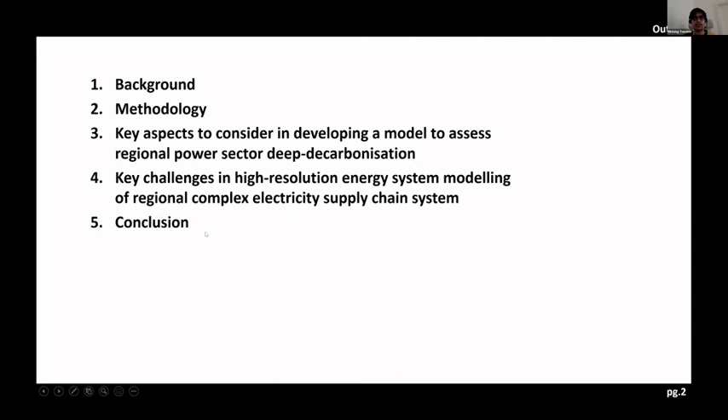To introduce the issue, deep decarbonization of the power sector plays a key role in reducing total greenhouse gas emissions dramatically to meet climate stabilization goals. The common strategy is to avoid, reduce, or remove carbon emissions from electricity generation, and use low carbon or carbon-free electricity to help decarbonize residual emissions from other hard-to-reduce sectors such as transportation, building, and industry.

Charting a path towards power sector deep decarbonization is a complex task, considering the wide-ranging portfolio of technological solutions and respective challenges. A good fit model is suitable for scenario analysis to help substantiate questions related to system capacity deployment and operation, as well as to provide insights on how the system behaves in a given condition.

So the research question here is: in assessing pathways of regional power sector deep decarbonization, what are the aspects of energy system modeling that need to be considered? What are the challenges in modeling the complex electricity supply chain, and how to address these aspects and overcome those challenges?

As we know, the key issues related to the energy system is that power sector deep decarbonization needs to integrate large-scale renewable energy resources and carbon capture, transport, and storage technology. There are risks of over- or underestimating potentials and impacts by not considering the spatial and temporal implications. This is mostly regarded to the access, quality, and cost of different energy sources, and also carbon - we call it source and sink matching.

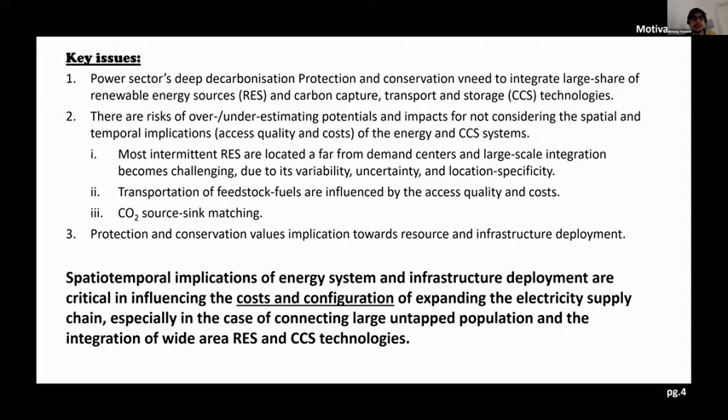The aim of this review is to give a comprehensive overview and to discuss the key aspects and challenges of spatially explicit energy system modeling for regional power sector deep decarbonization. There are different focuses of different literatures that I classified here to give an insight about the aspects and challenges.

First is those that focus on the grid-based multi-energy system concepts and modeling, where there are different energy processes and networks to be considered in a full energy system or energy supply chain. Then there's the biomass supply chain model, different supply chain analysis for the biomass feedstock in a process.

And there's the generation and transmission co-optimization model, where this considers also the transmission and distribution on top of the generation problem. There's the carbon capture and storage infrastructure model that considers different networks of CO2 capture and storage for the energy sector. And there's the integrated assessment of energy system externalities, and the evaluation of energy system modeling frameworks.

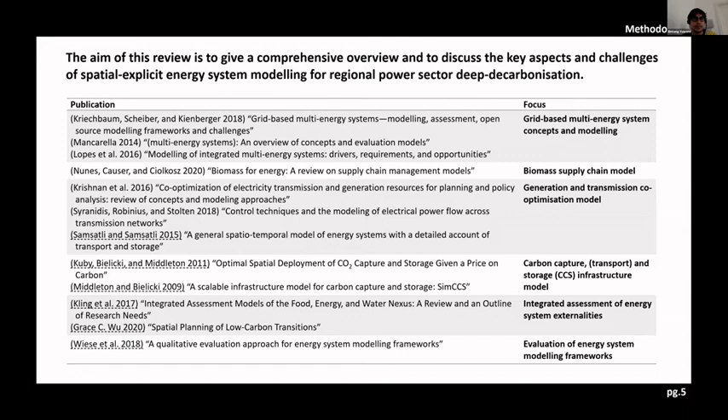We start with the finding when we see the aspect of modeling, especially in the scope and coverage, trying to address the real problem. The decarbonization of the power sector is achievable through deployment and operation of low, zero, negative carbon electricity supply technologies.

The power sector capacity planning aims to secure adequate, reliable, and cost-effective electricity supplies to the region. This has a correlation in how decisions on investment, such as size, siting, and when the technology can be deployed, or the operation of such technology to produce or supply electricity, becomes the question on how the decarbonization of the power sector can be achieved.

So the scope will be about long-term capacity investment planning, but considering the short-term dynamics related to operating activities. It covers, when we say regional, a region that consists of a country or multiple neighboring countries, such as the European region or the United States, for example, that have different states.

And this comprises different sub-regions that became interconnected with different transport corridors to transfer energies between locations.

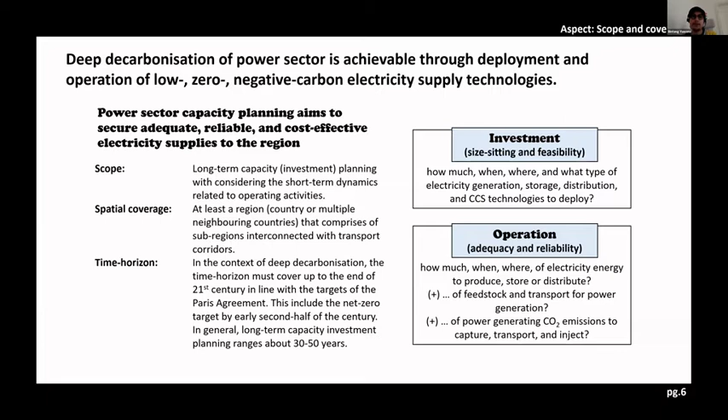Envisioning these kinds of pathways requires an understanding of how the energy system could evolve in the future through scenario modeling. The system boundaries we consider must be carefully defined in order to comprehensively assess the various deep decarbonization strategies.

We categorize those strategies in three ways: using low, zero, or negative carbon technologies, by means of different energy carriers that have different emissions impacts, such as using lower emissions natural gas and biomass to replace high-emitting oil and coal, and also using zero carbon technologies by means of zero carbon generation, which is using renewable energies.

There are also negative carbon technologies when we envision the use of CCS, coupling with biomass to create carbon dioxide removal, or using direct air carbon capture and storage. All of these will impact how the electricity supplied fulfills demand in the region.

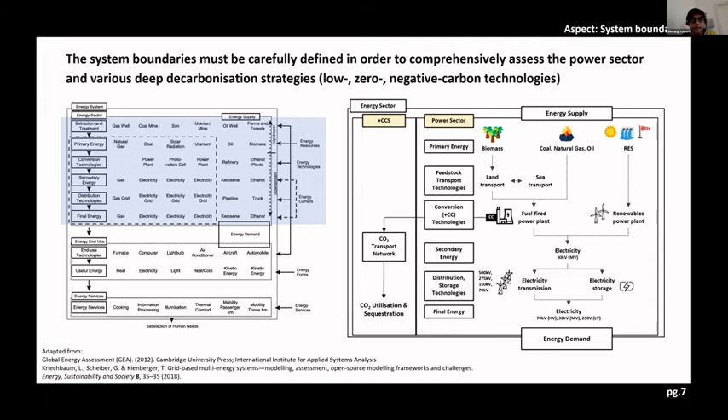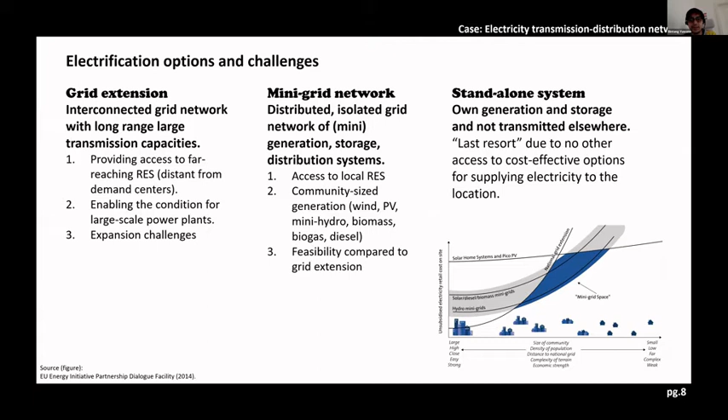The case here would be the electricity transmission and distribution network, where electrification has many different options and challenges, such as choosing to extend the existing grid, create a mini-grid network isolated from the main grid, or make a standalone system, usually in remote areas. There's also the challenge in deep decarbonization to integrate large-scale renewable energy sources.

The characteristics of renewable energy sources, starting from variability, can create profile costs, because there's a risk of inappropriate load matching, where there are risks such as undergeneration or overgeneration during the different loads of those renewable energy sources and the load of demands.

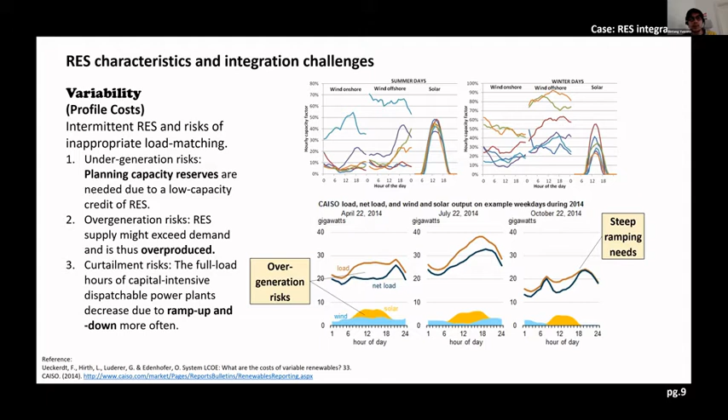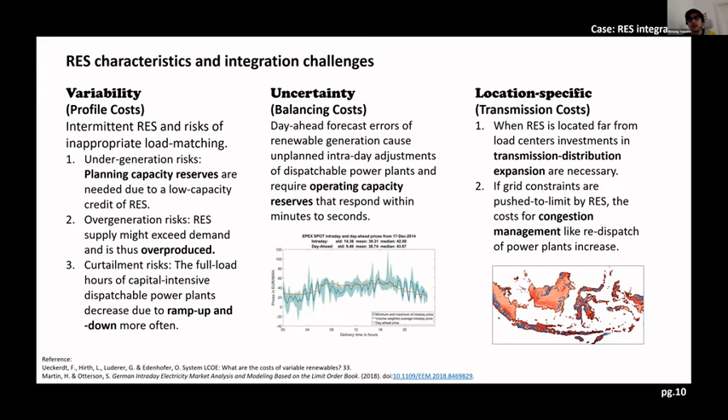There's also uncertainty, because day-ahead forecast errors can happen for intermittent renewable generation, and also the location specificity of renewable energy, which requires large transmission to transfer supply from high renewable energy regions to demand centers that lack these potentials.

There's also the case when we consider biomass coupling into the energy system. The cost of biomass and fossil fuel feedstock for electricity generation is largely influenced by how those resources are procured, treated, and transported.

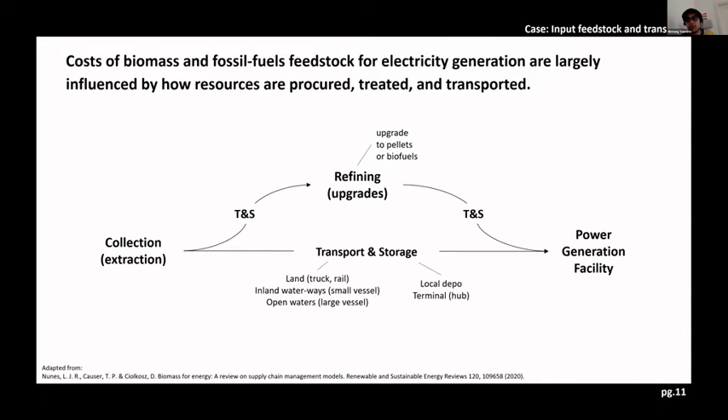For example, countries with large biomass potential that export it mostly need to consider how to use it domestically in a competitive way. They require an understanding of the improved supply chain for domestic measures, such as how they collect, refine, transport, and store feedstock for power generation facilities.

There are also different carbon capture, storage, and utilization technologies that can be coupled to the energy system to achieve the vision of negative carbon electricity in a deep decarbonization scenario. There are different capture points or technologies considered, as well as the network to transfer captured CO2 to points of utilization or storage.

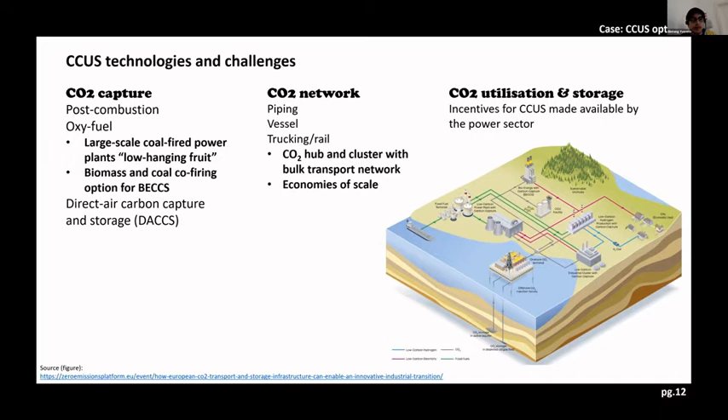The protection and conservation values imply implications for energy sector development in terms of resource usage limitations, siting suitability regarding infrastructure deployment, whether land is protected or restricted, and the operation of energy technologies regarding emissions or pollution controls and different renewable feed-in tariffs that make operations more feasible or competitive in the existing market.

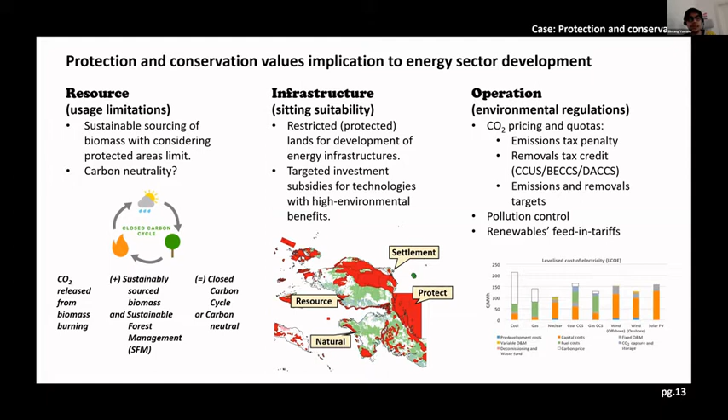With those challenges for deep decarbonization comes the cost of modeling effort in terms of increasing complexity, where it should represent the physical flows of energy along the electricity supply chain, and also the CO2 flows when we have CCS enabled.

So there are different levels of complexity that need to be considered when we have different components of the electricity supply chain in the context of deep decarbonization.

For example, when we have the electricity generation problem combined with the electricity transmission problem, combined with the CCS infrastructure problem, this becomes a really complex problem if we consider each aspect in the same way as a complex electricity system, for example with different part-load efficiency or the AC/DC conversion that makes it more complex.

But then there are choices to use assumptions to make the model simpler, such as a black box approach that uses constant efficiency instead of part-load efficiencies. So this consideration becomes about making it more complex or more simple for the model.

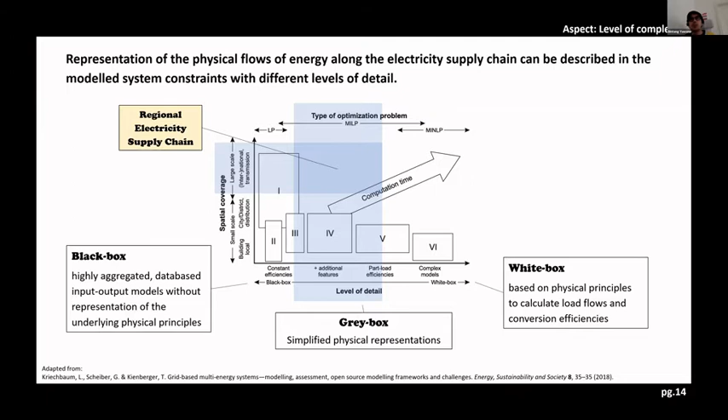And the aspect of the spatio-temporal resolution is important because in this electricity supply chain in the region, we know that the energy is not always supplied where and when it is required.

This imbalance may be compensated through transmission grid, to reduce the spatial problem between energy supply and demand, or held by storage to discharge at later time. This is to solve it temporally by holding it, charging it, and then discharging it in a different time.

So this issue about spatial consideration became important when we consider the different fuel costs, the different access quality and costs of different energy sources in different regions.

So, for example, when we define the complexity of the different components, it can be mapped in different levels of spatial and temporal resolution. For example, if we consider the electricity transmission and the generation and storage at the same time, it has to have the same level of detail to consider the movement of electricity and the supply and demand in a timely manner.

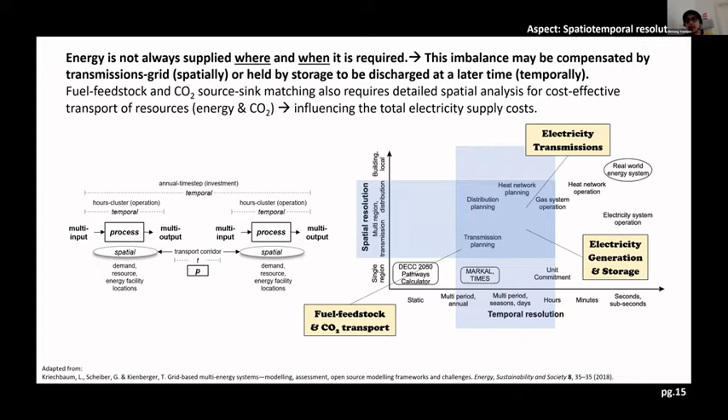So in terms of the model formulation, there are two types, two groups, depending on how they approach the problem. It can be a simulation or an optimization or a backcasting.

This is to provide a scenario of how the energy system should evolve given a future state, compared to the optimization part. And there's the partial equilibrium model, there's the agent-based model that consider the system as agents that individually assess its own situation and makes decisions based on a set of rules.

But also there's the question of how they address the uncertainty of the problem, whether using a deterministic model or a stochastic or probabilistic model.

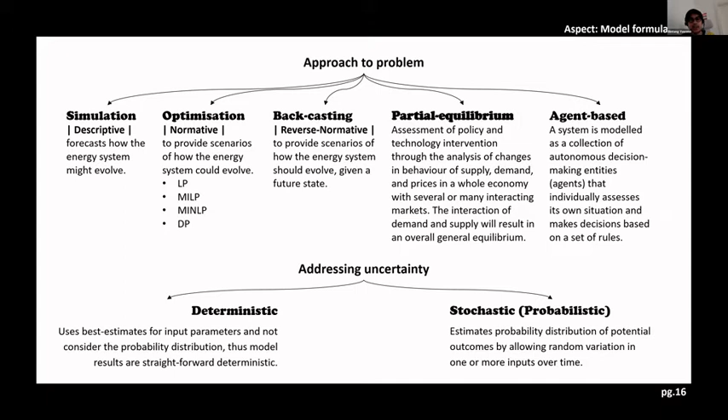This uses deterministic, using different assumptions and data that consider the best estimates, while stochastic modeling uses the probability distribution of data and assumptions to allow random variation in one or more inputs over time. This approach actually makes the model much more complex using the probabilistic distribution.

And there's also the aspect of data, where finer spatial and temporal resolutions of the model require appropriate values of both the parameters and independent variables.

This vast amount of data required is often not available because it is not measured or commercially confidential, or it's highly uncertain or in bad quality. Or it's also available in different spatial temporal resolutions. So the data can be coarser in those resolutions, or it can be finer.

But then there are also approaches on how to make the required data in the same level of resolution that the model requires, through downscaling or aggregation of data.

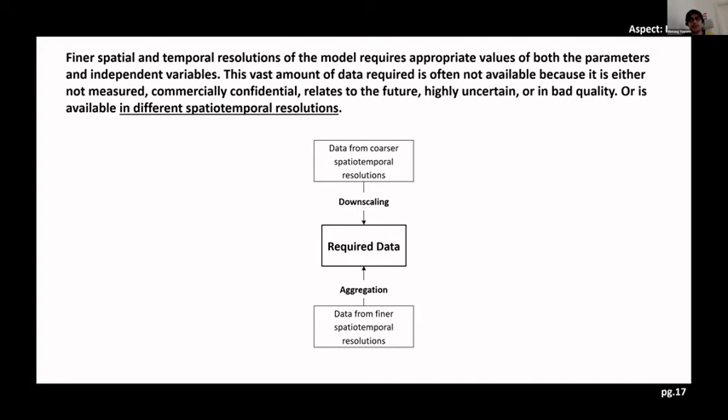Bintang, sorry to interrupt, 2 minutes left. It's okay, 2 or 3 minutes left.

Okay, I'll be short in this part. So there's also the aspect of assessment criteria. We consider different dimensions here: the technical dimension, the techno-economic dimension, the socio-technical, resource, and environment.

So the climate change mitigation and the sustainable development goals provide the integrating framework for assessing the feasibility of energy technology options, considering the integrated multi-dimension interaction between those technology, resources, society, and environment. So these will be considered for choosing different energy technology options, to consider whether it is affordable, secure, accessible, acceptable, and sustainable.

So there are challenges here, especially in addressing space and time. Selection of spatial temporal resolutions should consider the extremes where decisions may shift. For example, if we decide on expanding a transmission line, usually the cost information is per kilometer cost or per 10 kilometer cost. Then to what extent those information can be inputted to the model, and how we should consider how resolution is defined.

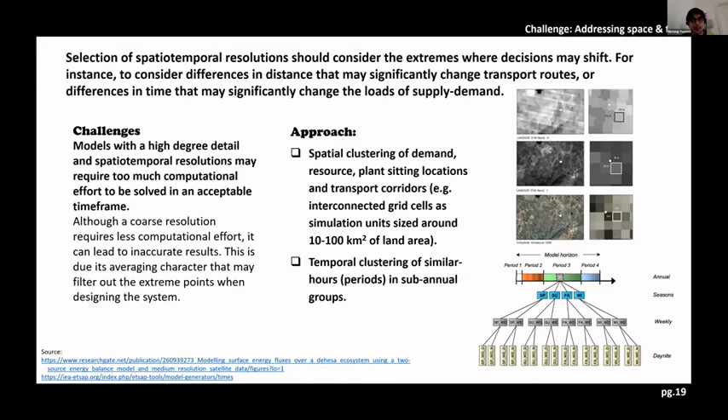And also regarding this, the appropriate assumptions and methodology are critical in delivering comprehensive results, while minimizing the required computational resources. So the issue about scale and complexity, we approach through problem simplification or decomposition of the problem, to make the model more tractable, or easier to deal with.

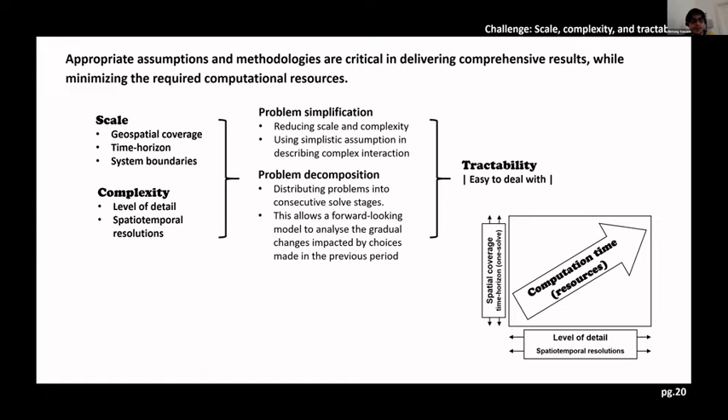And the third challenge here is the multi-dimension feasibility assessment. So coupling or linking technology-rich bottom-up models with economy-wide top-down models can integrate this large set of externalities to be considered, without significantly increasing the computation resource requirements.

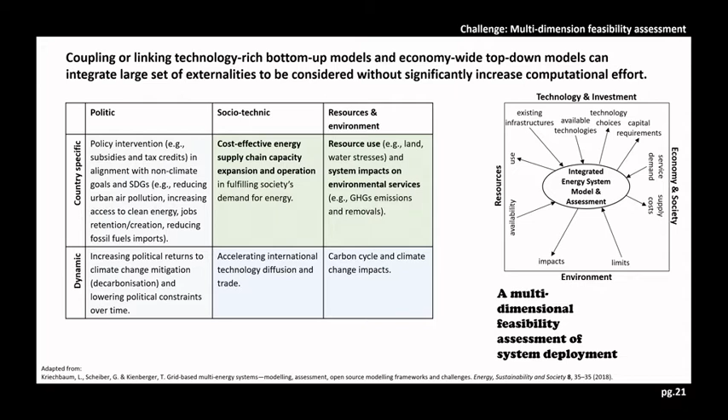So such as coupling this energy system model bottom-up technology options with CGE or partial equilibrium kind of model, to assess these different aspects external to the energy system.

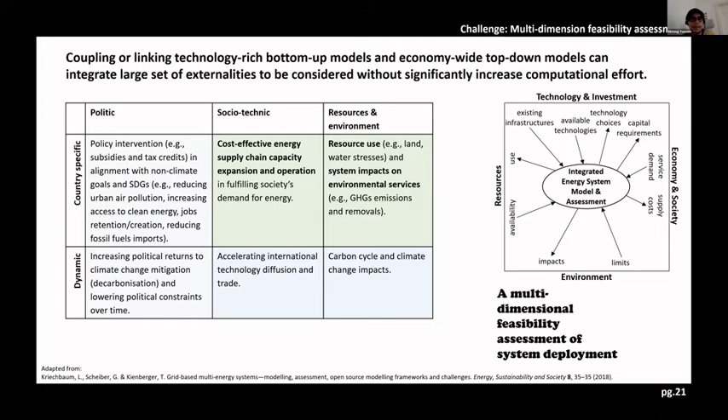There's also the challenge in uncertainty, transparency, and reproducibility. One minute left. Okay, so thank you.

Regarding the availability of data, as we discussed before, the required data can be downscaled or aggregated from different spatial temporal resolution if it's not available. But those data can also be information that are determined with best estimates or expert judgments, or with probability distribution around the data, such as wind resource distribution.

These need to be addressed, the uncertainties there, whether using determined data or probable data, using different approaches there. That is to improve, but in the process to address these uncertainties, there also needs to be improvement in the aspect of transparency to ensure that the process can be evaluated on how they address the uncertainties.

So improving the transparency and reproducibility, the concept of open source modeling, provide open data for the data processing part, but also provide open access for the model formulation and choice of software. There's also open data in terms of the results and how the results are processed.

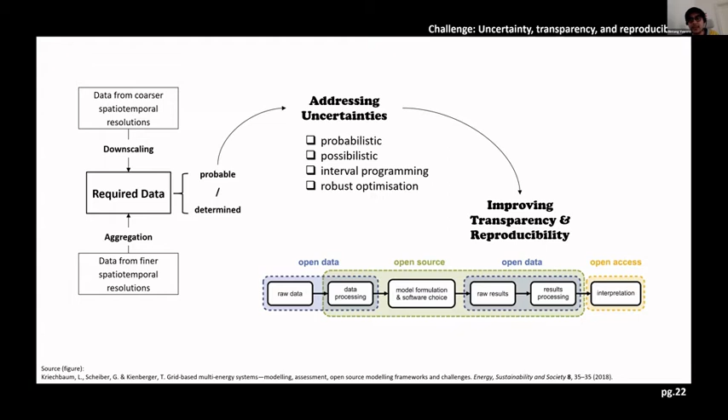So in conclusion, this paper provides an overview of the current research and challenges of modeling the energy system for power sector deep decarbonization. The key modeling aspects and challenges that need to be considered in model development have been discussed.

So there are aspects about robust and efficient analysis of the power system in the context of deep decarbonization. There's also the aspect to incorporate the complex interaction between various energy carriers, processes, networks, focusing on electricity generation, storage, distribution system, and power flows.

There's also the long-term capacity planning model that should account for securing the supply system in the short run. There's also the model formulation and data that need to be adjusted to best substantiate the problem in question. So the challenges can be addressed with coupling short-term operation models with long-term capacity planning.

There's increasing model complexity, also accounting for externalities that will hamper model tractability, and also soft linking bottom-up and top-down model solution options. There's also the aspect of open data, open source, and open access that need to be addressed to increase transparency and furthermore increase modeling impact.

Okay, and that's all from me. I'm open for questions.

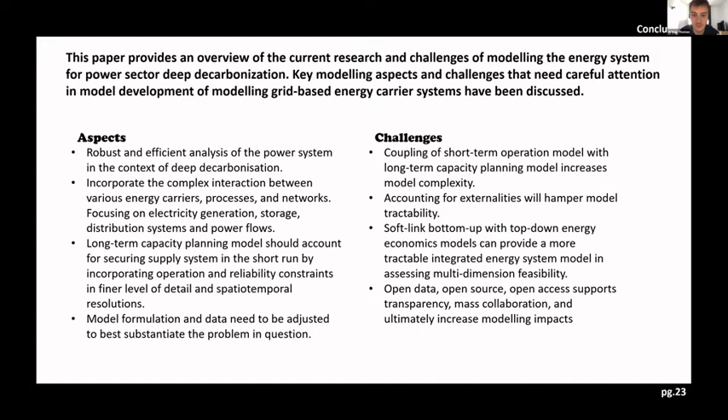Yes, thank you very much. Thank you very much for giving me the microphone. Can you hear me? Yeah, perfect.

Yes, my question was about CO2 emission first. Thank you very much for your very interesting presentation, I think it is quite comprehensive and it rings many bells with my personal experience. When accounting for CO2 emission, do you consider direct emissions mainly due to fuel combustion, or do you take into account indirect life cycle emissions, like for instance due to mining, manufacturing, installation, maintenance, or dismantling?

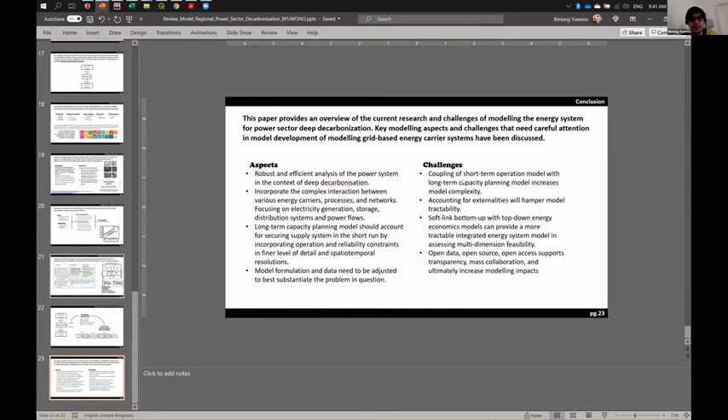Well, the plan is to have an integrated assessment where we consider also the land use impact of the energy system. When we already consider the spatial dimension, we can also consider the impacts of this energy system, considered in the localities where the different energy supply system is being deployed.

That also comes up with information on indirect land use emissions, and also in an energy network model, transportation of biomass can also be accounted for in terms of emissions for the transporting part. So this information can be evaluated when the model considers these resolutions, spatial temporal resolutions, and the energy networks.

Okay, I hope that answered the question. Yes, thank you very much.

Just an additional question. The way you integrate those environmental externalities, basically, if I understand you well, is as constraints. Are you in favor of monetizing externalities, or do you prefer to stick with more obvious factors like what we get from life cycle analysis, which tries not to mix distinct externalities and to keep separate, for instance, water pollution, human health, and biodiversity, to allow for a better understanding and balance between those several impacts?

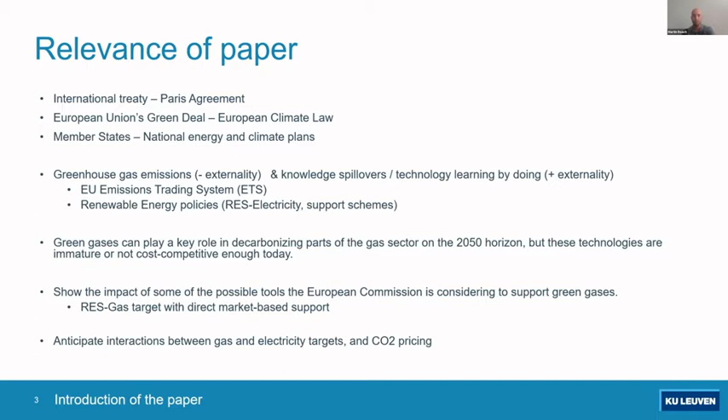In terms of what green gases are, they do not directly emit any CO2 of fossil origin. Hydrogen is an important molecule in industry and heavily relies on fossil-based energy. Two methods of green hydrogen production are water electrolysis using renewable electricity, or thermochemical conversion of biomethane, for instance.

Two methods of biomethane production are anaerobic digestion of organic matter, or thermal gasification of biomass. Biomethane can be readily injected into the gas network and subsequently used in any demand segment.

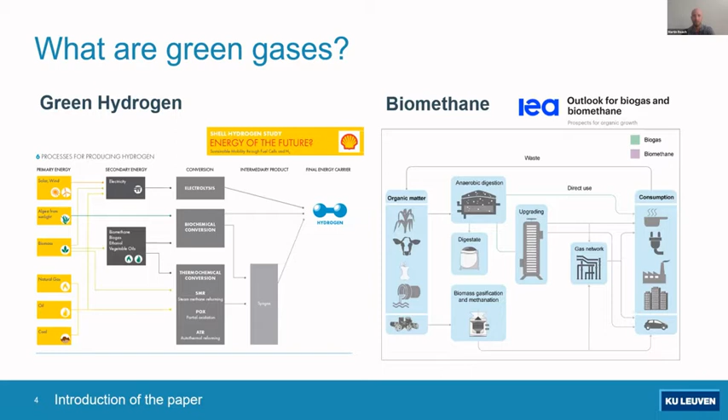I'll continue with the academic positioning. As I said, market failures related to CO2 emissions and knowledge spillovers provide an economic rationale for implementing a policy mix. As summarized by Lehmann and Gawel back then, one of the main concerns about electricity support schemes is interaction effects between instruments.

Some criticisms include that CO2 emissions reductions in the electricity sector would simply be displaced to industry, and that renewable electricity support schemes substitute a more expensive form of abatement for another.

The authors describe other market failures which also justify renewable energy support, which I do not detail here. Del Rio admits that policy mixes inherently lead to interactions between instruments, but suggests this can be mitigated in coordination or design. The interaction effects between instruments, namely renewable energy and carbon markets, has been studied using numerical models, which is the approach that we take.

This brings us to the gap in the literature, formulated as two main research questions. First, is a gas target and support schemes necessary to replicate the renewables deployment success of the electricity sector in the gas sector? We study to what extent existing policies support green gases. Second, are interaction effects between an electricity and gas target relevant in a multi-sector energy market setting? And if so, can we provide input for the design or implementation of a gas target?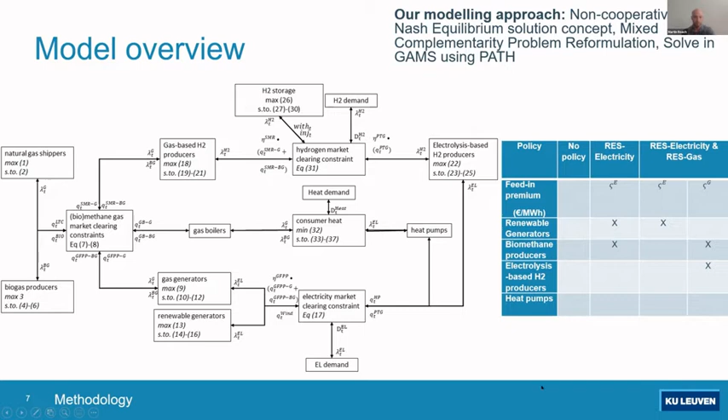We also consider the case of a CO2 emissions market policy in which natural gas consumption, including for heat, is subject to a CO2 price.

Here I will present our stylized approach with our main assumptions. We assume perfect competition and that agents have complete information. It's a single shot model where investment and production decisions are taken simultaneously. It's an integrated market model, so we do not model network constraints.

There are 4 representative days considered to capture seasonal or daily characteristics. We take renewable availability and demand data from a TSO, and heat demand from a time series dataset. We assume one representative technology for each agent and obtain the technology cost data from the DEA. We compute an equivalent annualized cost for each of them. We also assume that gas shippers and biogas producers have fixed variable costs. Lastly, for this type of model, we do not allocate the policy costs to the agents.

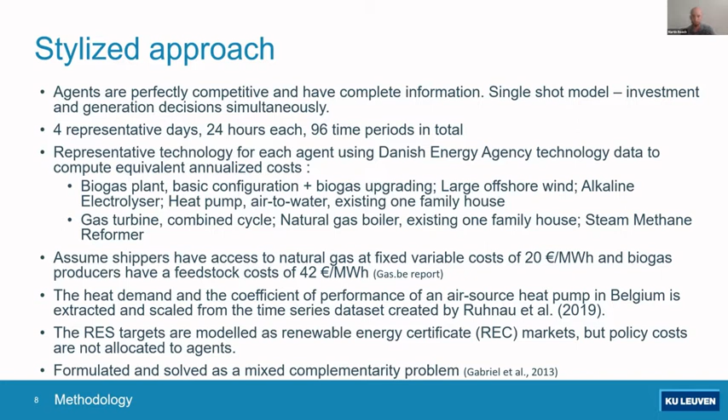We consider 3 policies, as I mentioned, which drive the investment decisions of agents. The first two are closest to the status quo, while the third is a possible way forward. The first policy is an electricity target. Given this policy, we run scenarios which change the ambition and investigate the solutions of each scenario. The second policy is a CO2 emissions market.

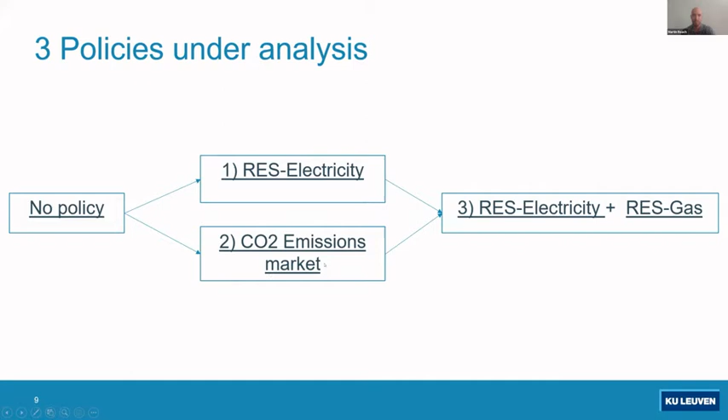I will discuss the findings of these two policies first, supported by figures. Later I will discuss the findings associated with the third policy, a dual electricity and gas target. Here's an overview of the findings in the same order.

In the electricity target scenarios, wind is the least cost renewable technology to meet the electricity target, and above a 40% target, more wind capacity causes spillage or curtailment. We illustrate with a 65% electricity target that biomethane and power-to-hydrogen are indirectly supported due to negative electricity prices.

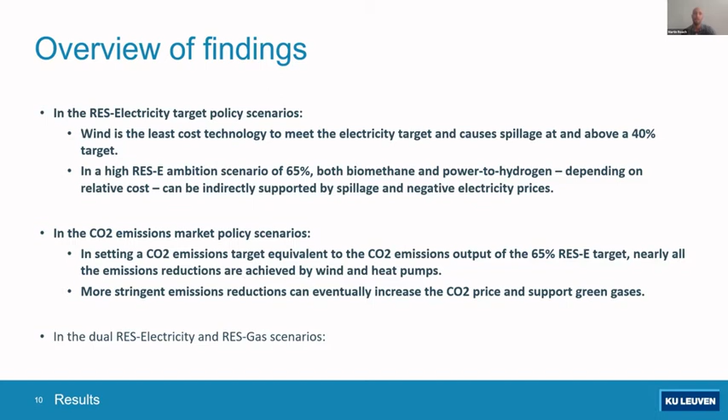In the carbon emissions market policy scenarios, a similar result is obtained when we take the CO2 target equivalent of the output from the 65% electricity target. Wind and heat pumps are the least cost means to make emissions reductions. But a more stringent emissions target increases wind capacity, which also causes spillage and electricity prices to go to zero in these periods. So the CO2 price would have to rise significantly, and eventually that would be enough to support green gases.

So this figure depicts the result of one of the scenarios - a 65% electricity target, as I mentioned. Over the 96 time periods, it illustrates the hourly generation in the shaded areas and demand via the stacked lines. You can see substantial generation from wind, and its unavailability is complemented by natural gas generators.

And as you can see in the last periods, there's substantial spillage from wind, and these cause negative prices, which reflects the point at which the wind generator is willing to reduce its output because of the opportunity costs associated with foregone subsidies. So in turn, the wind generator earns no revenue in these periods, but the negative electricity prices incentivize power to hydrogen, who is paid to consume.

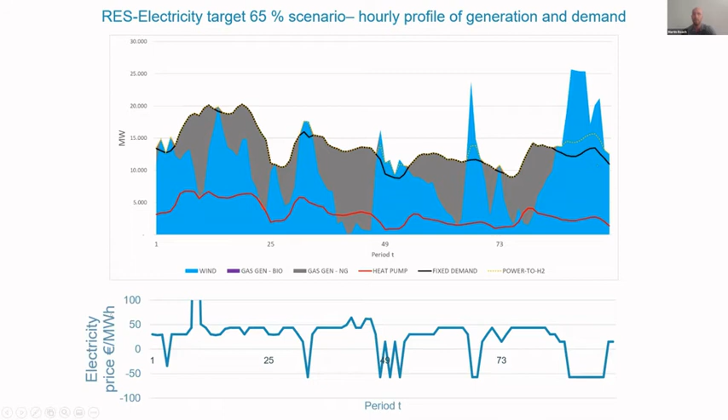So next we'll look at the emissions target policy. This figure depicts how energy supply and demand are met over an entire year in gigawatt hours and in each segment. This scenario reflects a CO2 emissions target equivalent to the emissions that were resulting from the 65% electricity target we just saw. So in the electricity segment, we see that wind plays a major role, and in the heat segment, heat pumps meet nearly all of demand.

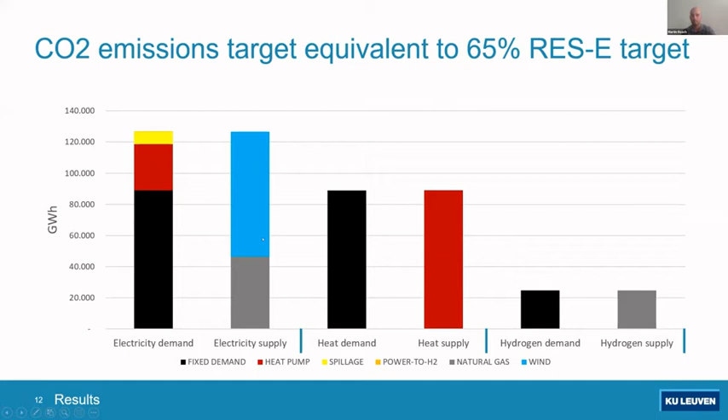So while wind is the logical outcome, the cost competitiveness of heat pumps improves against gas boilers as the CO2 price rises, and is a cost-effective way of displacing emissions. But as you can see, an emissions policy largely supports mature or electricity-based technologies. In the interest of time, I do not illustrate more stringent emissions targets, but if the CO2 price rises substantially as more spillage occurs, this can incentivize green gases. So as we can see, green gases are only indirectly supported by existing policies.

So let's consider a dual electricity and gas target and investigate potential interaction effects. The main findings here are that clear interactions exist. An electricity target can contribute to a gas target and vice versa. However, these interactions are substitutive, meaning progress in one may crowd out investment in the other. In other words, the final output of renewable energy in the electricity or gas sector depends on the coordination of the electricity and gas target ambitions.

Additionally, the deployment of power to hydrogen appears to depend more on the electricity target than the gas target. Therefore, it's a bit unclear if a gas target is effective in supporting biomethane and power to hydrogen if defined in technology neutral terms. So first, I'll just demonstrate what I mean by interaction effects via three scenarios, illustrating renewable energy production over an entire year in gigawatt hours.

So for each scenario, you can see renewable energy's contribution to the electricity target on the left and to the gas target on the right. One may expect the combined effect of renewable energy policies to be at least the sum of the parts, but that's not what we observe. In scenario one, biomethane is the least cost resource to meet a gas target. In scenario two, wind is the least cost resource to meet a 25% electricity target. So you would expect scenario three to be the sum of these two individual targets, which is the total RES aim, but instead there's less.

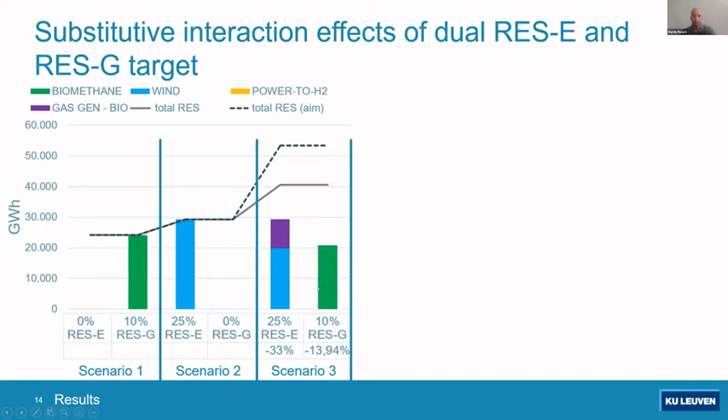So scenario three combines both targets, and two substitutive interaction effects result. For the gas substitutive effect, when biomethane is produced, part of the gas generation can then be counted as renewable. As a result, this counts towards the electricity target and crowds out wind investments. For the electricity substitutive effect, as you build out more wind, this displaces some gas generation. As a result, this reduces the total gas consumed, and thereby the total quantity of biomethane necessary to meet the gas target.

So I'll not go into detail, but through the electricity and the gas target, this plays out and is somewhat cyclical. To evaluate the strength of these interaction effects, we look at the coordination of the targets, taking some more scenarios. So in scenarios 4 through 6, we doubled the ambition individually and together.

So in comparing scenario 3 that we just saw to scenario 4, which doubles the electricity target ambition, wind increases by 165% and biomethane decreases by 27%, even though the gas target was unchanged. And in comparing scenario 3 to scenario 5, which doubles the gas target ambition, biomethane increases by 120% and wind decreases by 63%, even though the electricity target was unchanged.

And then in comparing scenario 3 to scenario 6, which doubles both targets at the same time, wind more than doubles and biomethane only increases by 57%.

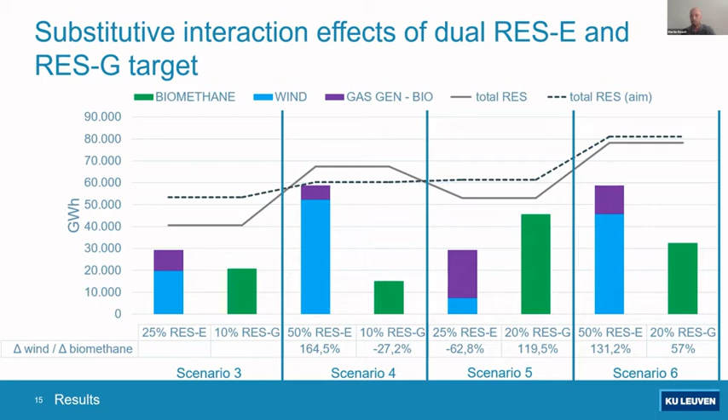Aside from these interaction effects, there are also clear interdependencies of the dual targets to highlight. So in the 25% electricity target and 10% gas target, but excluding heat pumps from the model in scenario 7, more biomethane is required as natural gas boilers are not substituted by heat pumps. Therefore, heat pumps help meet a gas target.

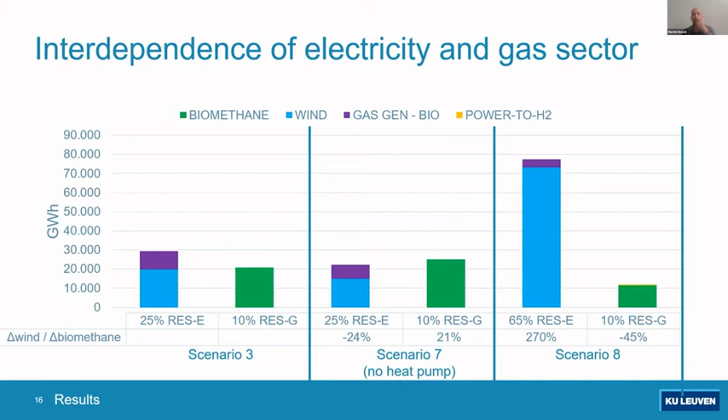Lastly, in the scenarios we've seen so far, biomethane is the least cost means of achieving a gas target, whereas power to hydrogen requires periods of spillage or curtailment to be cost competitive. And this is confirmed by scenario 8. So this kind of begs the question, if a gas target is deployed, is the gas target to deploy the least cost green gas, or is it to support a range of green gas technologies?

So I now move to the conclusions, which are based on the two questions we tried to answer. First, can we replicate the success in deploying renewables in the electricity sector, also in the gas sector? So in theory, if immature and emerging green gas technologies are not directly supported by current policies and face technology related market failures, then the motivation for a gas target and support schemes could be justified.

However, it's not clear which green gas will become most efficient in the long run. There's uncertainty about technology learning curves. So a policy could encourage a range of green gases which may not be achieved with a technology neutral gas target. The second question: are there potential interaction effects between dual electricity and gas targets, and what does this imply for the design or implementation of a gas target?

We see that there are clear synergies observed between the electricity target, which can contribute to meeting a gas target, and vice versa. However, this also means that there are substitutive interaction effects, which ultimately modify the final output of renewable energy in each sector. Therefore, to reach the desired goal of green gas deployment, these targets should be coordinated.

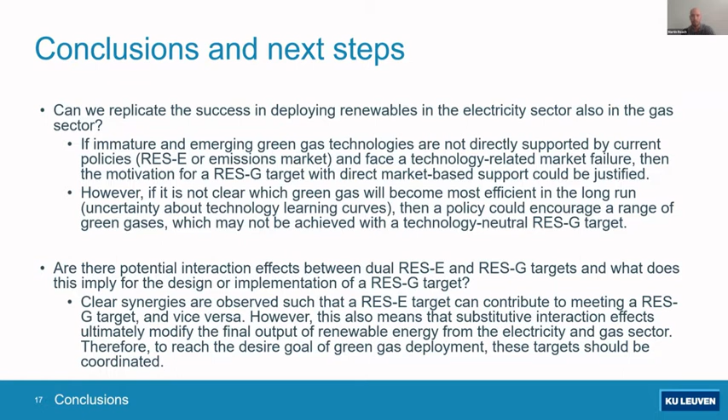That is the end of my presentation. Thank you for your time and attention. Happy to take any questions.

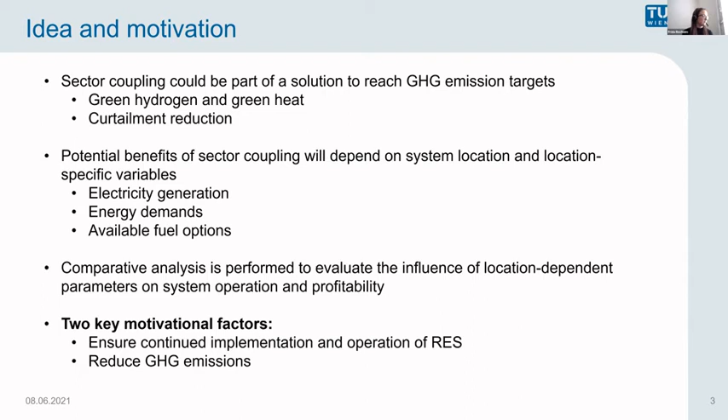In the paper we have some KPIs that we want to investigate to evaluate the performance of the sector-coupled system. We want to look at the profitability - how profitable the system is under the given assumptions. We also want to look at how the different technologies are utilized within the system.

Another important KPI is how well the system is able to reduce greenhouse gas emissions. We also investigate how well the system is able to be self-reliant in terms of meeting local energy demands with renewable energy produced within the system boundaries.

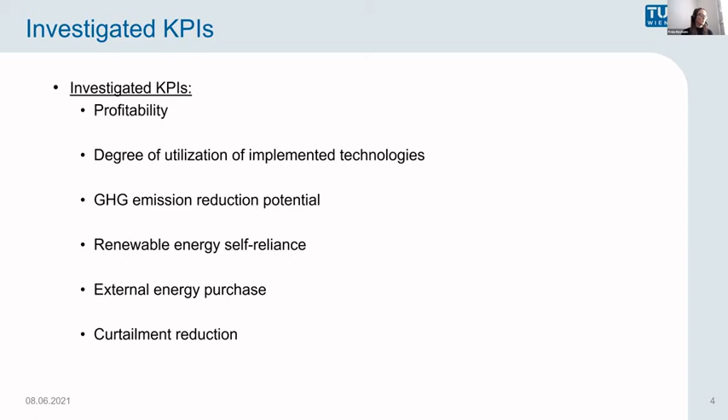We are also looking into how much energy is being purchased externally, from the market. And finally, we also want to look at the curtailment that's happening.

To investigate all of this, we have developed an optimization model of a sector-coupled system in Julia. So far it's a purely operational model - it doesn't consider any investment costs. The objective of the model is to maximize the profit while meeting the local energy demands and, of course, also following the technical constraints at all times.

The objective function is shown here, and we have revenues related to selling electricity to the electricity market, selling hydrogen to the gas market, and selling hydrogen to industry or mobility. The costs are related to buying electricity from the electricity market, either to cover the local electricity demand or for feeding into the heat pump.

There are also some costs related to buying heat from an alternative heat source to cover the local heat demand, and buying natural gas from the gas market to cover the local gas demand.

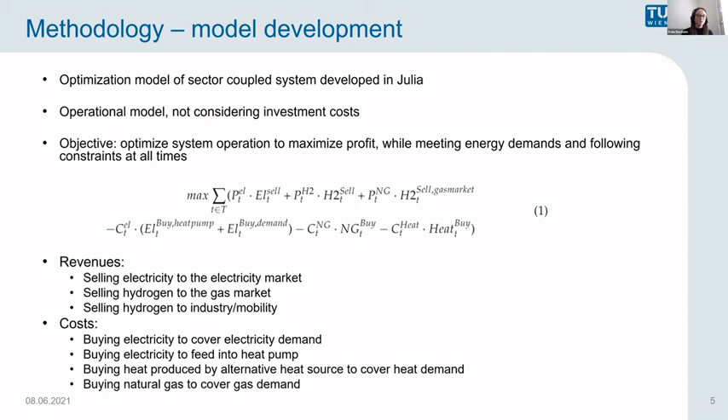Here is a figure which represents the system that we are investigating. It includes both power to heat and power to gas technology through the implementation of the heat pump and the electrolyzer.

The wind farm generates electricity that can either be used to cover the local electricity demand, sold to the electricity market, curtailed, or fed into the heat pump or into the electrolyzer.

The electrolyzer then produces hydrogen that can be used to cover the local gas demand, or it can be sold to the gas market or to the industry sector.

There is also some waste heat produced in this electrolysis process, and that waste heat is then used to cover the local heat demand. The remaining heat demand is then covered by heat from the heat pump and heat from an alternative heat source.

So we then defined 3 separate use cases: one Austrian, one Norwegian, and one Spanish use case. Each of these had individual location-dependent parameters. The parameters we chose to investigate as input were the electricity generation from the wind farm, the local electricity, heat, and gas demand, the electricity prices, the gas prices, and the price for alternatively produced heat. We also considered the type of alternative heat source available and the corresponding emission, and the electricity mix of the use case.

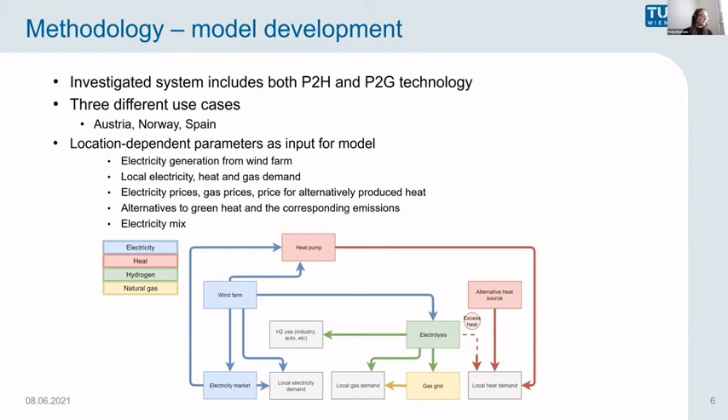So as I said, we defined 3 separate use cases: Austria, Norway, and Spain. The Austrian use case is assumed for the Neusiedl am See region, with 4,290 households. We assumed a wind farm with an installed capacity of 32 megawatts. Based on data from Eurostat, we found that the majority of the heat demand is covered by natural gas, but district heating and electricity are also important sources to cover the local heat demand.

For the Norwegian use case, it's based on the municipality of Åfjord with 1,961 households considered. The wind farm here is assumed to have an installed capacity of 57.5 megawatts. The majority of the Norwegian heat demand is covered by electricity, so for the Norwegian use case, we didn't consider any local gas demand.

The Spanish use case is made up of several smaller municipalities, summing up to approximately 1,000 households. The wind farm considered here was assumed to have a capacity of 31.5 megawatts. For the Spanish use case, we didn't consider any district heating demand, and the majority of the local heat demand is met with gas, but electricity is also an important source.

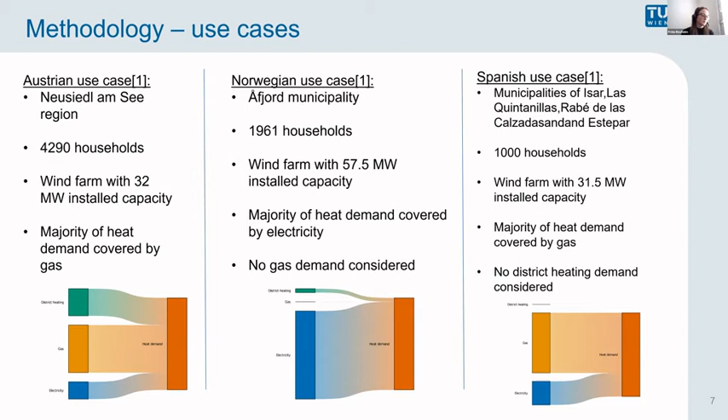So for each use case, we investigated 3 different scenarios. Scenario 1, the baseline scenario, didn't consider any additional technologies implemented—we only have the wind farm present. This means the heat demand is fully covered by heat bought from the alternative heat source, and the local gas demand is met with natural gas bought from the gas market. The electricity demand in this scenario is met either by electricity generated by the wind farm or electricity bought from the market. So in this scenario, we really don't consider any sector coupling at all.

In the second scenario, we've included a heat pump, and we assume that households that normally rely on gas for heating would now connect with a district heating grid and be supplied with heat from the heat pump instead. The heat pump is then scaled to be able to meet this increased local heating demand.

In scenario 3, we implement both a heat pump and an electrolyzer. We now assume that households that rely on district heating will be provided with heat from the heat pump, and if necessary, heat from the alternative heat source. We also assume that households that rely on natural gas will be supplied with hydrogen from the electrolyzer. The heat pump and the electrolyzer are then scaled based on the local heat demand and the local gas demand. This means that for the Norwegian use case, there is no electrolyzer because we didn't assume a local gas demand, and for the Spanish use case, there is no heat pump because we assumed no local district heating demand.

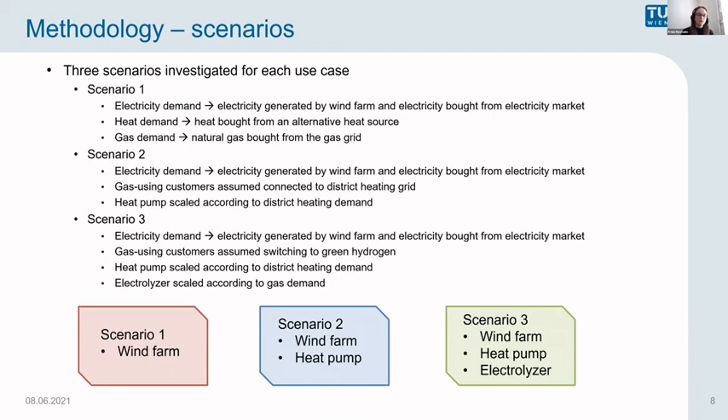Moving on to the preliminary results, first we can look at the economic results for the 3 use cases. For the Austrian use case, we see that the third scenario, with both an electrolyzer and a heat pump implemented, is the most profitable one. This is mainly due to the revenue from selling hydrogen from the electrolyzer to the industry, which significantly influences the profitability of the system, even if it means less electricity is available for covering the electricity demand. From the second scenario, we see that by introducing a heat pump, the costs related to covering the local heat demand can be reduced.

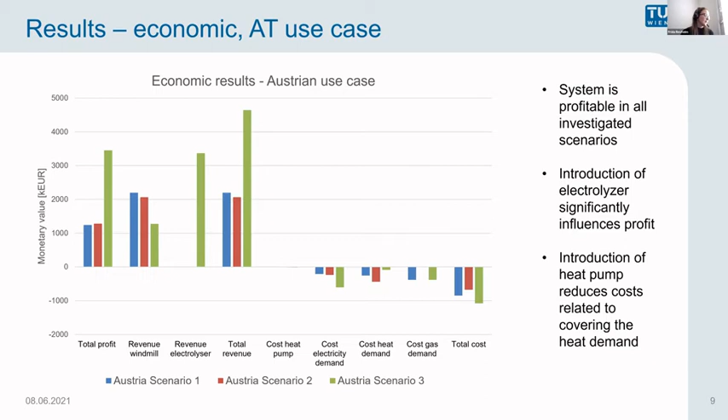An electrolyzer is not implemented in the Norwegian use case under the given assumptions, so we don't see this significant rise of revenue in scenario 3. Actually, scenario 2 and 3 are identical under the current assumptions of no local gas demand. But what we do see is that sector coupling through the implementation of a heat pump leads to a slight increase of the total profit also in this use case.

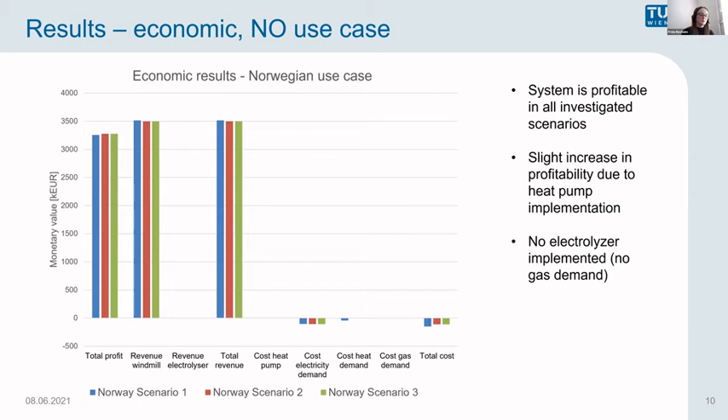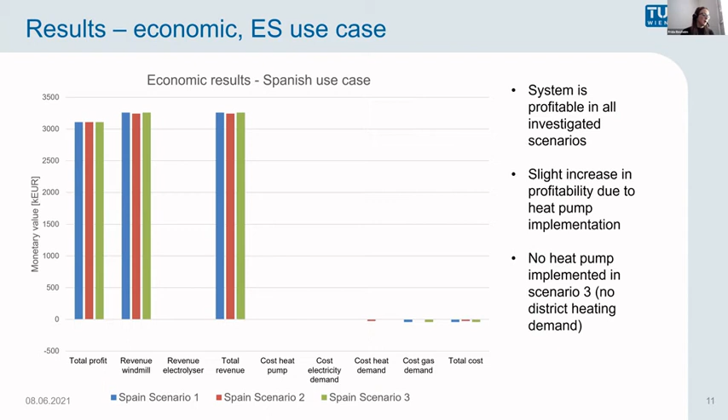For the Spanish use case, we have a similar situation. We see that the implementation of a heat pump in scenario 2 leads to lower costs related to covering the heat demand, which then results in a higher total profit.

Regarding how the implemented technology is utilized in the different scenarios, we have an example of how the system is operating in the Austrian use case for scenario 3, where both a heat pump and an electrolyzer are implemented.

We see that a lot of the generated electricity is being fed into the electrolyzer, due to the revenue the system obtains from selling hydrogen. The majority of the remaining electricity is then either sold to the electricity market, or used to cover the electricity demand.

Another interesting observation is that the gas demand is fully covered by gas bought from the gas market, because all of the produced hydrogen is sold instead of being used to cover the local gas demand.

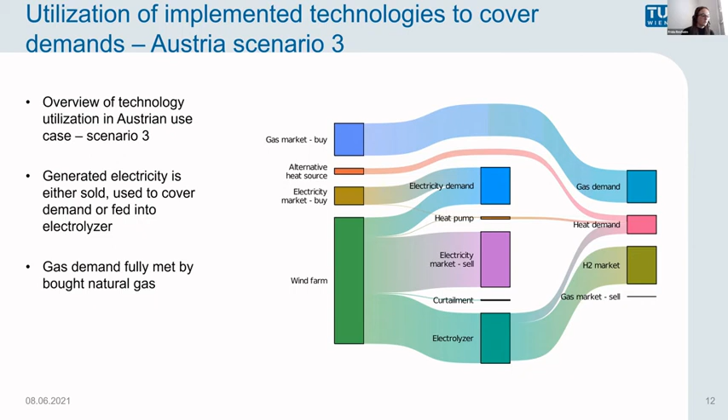We also looked at how the heat demand, usually covered by district heating and gas in the three use cases, is affected when we introduce these sector coupling technologies. In the Austrian use case, we have a heat pump and an electrolyzer implemented. However, because the hydrogen is so lucrative to sell directly, we still rely on natural gas bought from the gas grid to meet the demand. We also see that because the electrolyzer is used so heavily, the waste heat produced is able to cover quite a significant share of the heat demand.

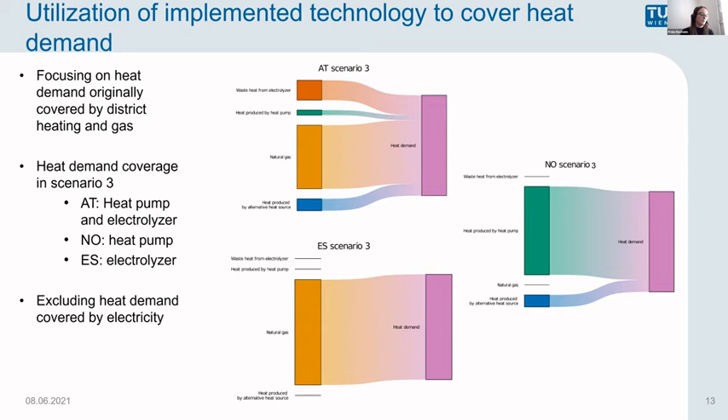In the Spanish use case, the entire heat demand is covered by natural gas bought from the gas grid. But for the Norwegian use case, the situation is different, as we don't assume a local gas demand and therefore don't have an electrolyzer implemented. So the heat pump is used to cover the majority of the heat demand, and the remaining share is covered by heat bought from an alternative heat source.

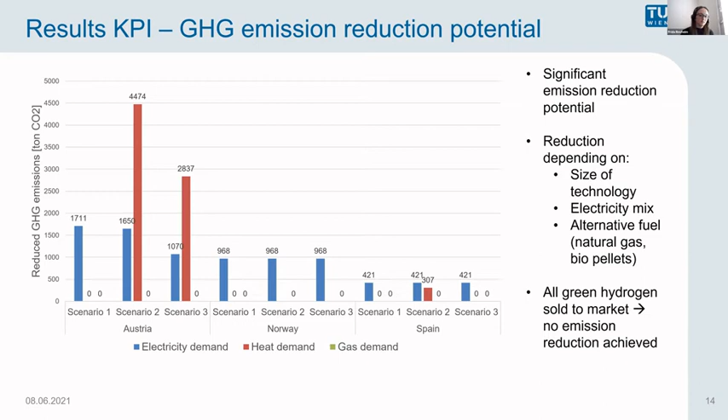Yeah, so under the current assumption, sorry?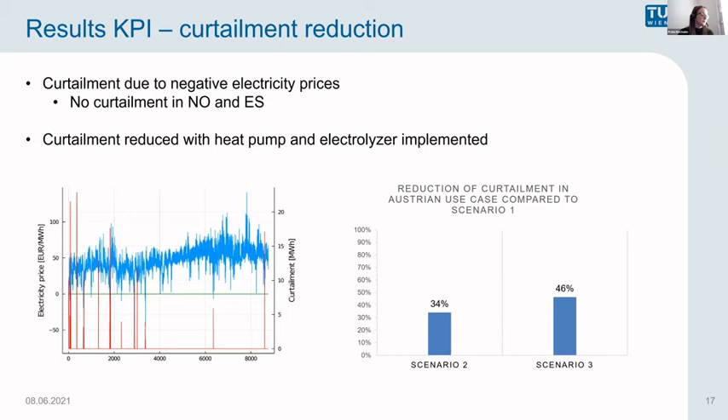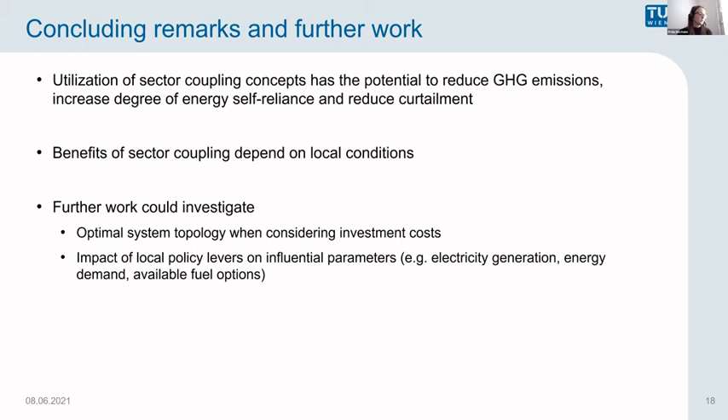So from our analysis and preliminary results, we see that by utilizing sector coupling concepts, we have the potential to reduce greenhouse gas emissions, increase the degree of energy self-reliance, and also reduce curtailment. But of course, how big or important these benefits of sector coupling are will depend on local conditions. So some ideas for further work could be to focus more on determining the optimal system topology based on local conditions.

And also to, for example, investigate how local policies and regulations could impact the system operation. Okay, just at the very end, I would like to mention that this work is done in collaboration with the Thermoflex project. Thank you very much.

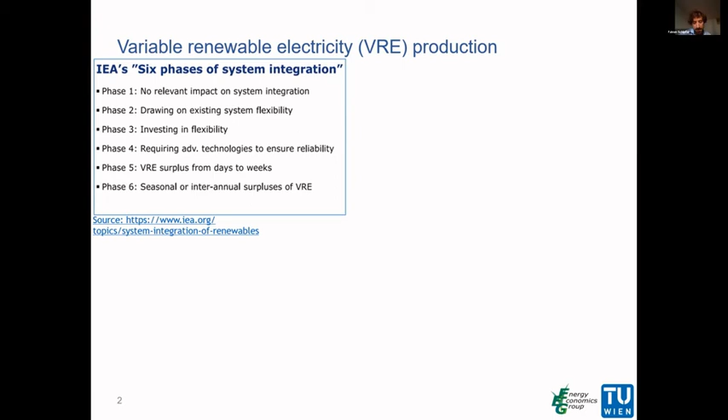One advantage of our technology collaboration program, IEA Bioenergy, is that we have experts in different countries who can give their opinion on how variable integration looks right now in their country. What we see is that most countries are already in phase 3 and are investing in flexibilization. This is a limited number of countries, but these are where we have expertise. At the point of writing, considerable shares of bioenergy are also integrated into the energy systems of these countries, especially compared to the shares of photovoltaic and wind.

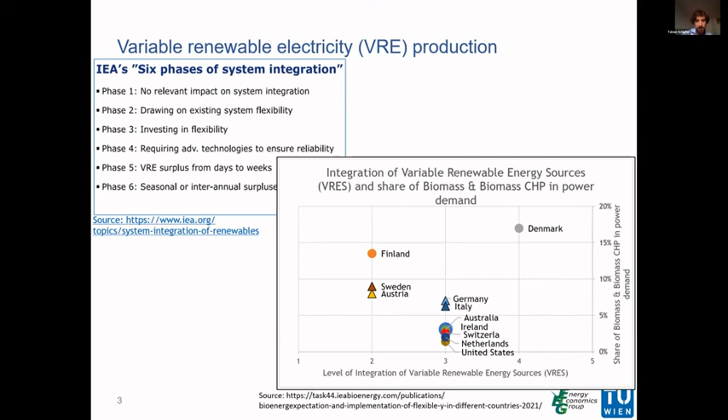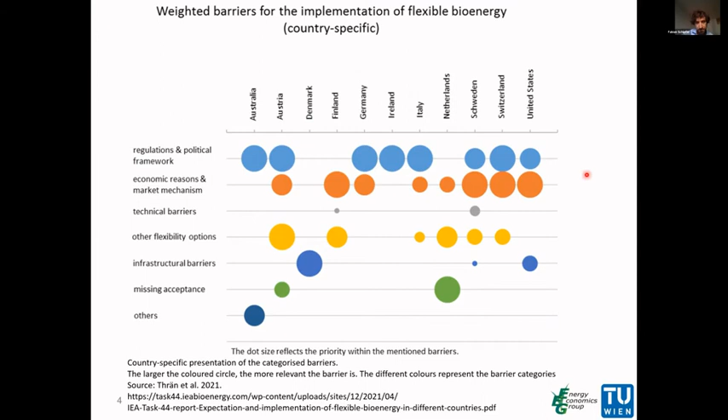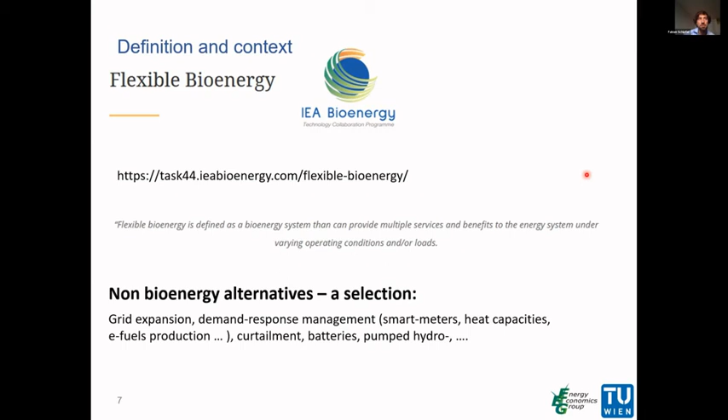To start, we have to answer the question: what's the definition of flexible bioenergy? The current consensus in our group is that it's defined as a bioenergy system that can provide multiple services and benefits to the energy system under varying operating conditions and/or loads. There are clearly other prevailing and advanced alternatives, such as grid expansion, demand response management, and other options already mentioned in the presentations before. But bioenergy gives us multiple options for how to further advance in this field.

To make a quick first picture of the options we identified, some of which have already been presented before, I want to highlight three main aspects of this multiple-options picture of flexible bioenergy. First, this is a supply chain topic—supply chain was also mentioned before by Bintang. It's something that goes through the entire bioenergy research, from the forest to, for example, the heating device in a residential building or the tank of a fuel car. So the flexibility can be found in different parts of this biomass-to-end-use chain, for example in the feedstocks, but also in applications, energy carriers, and intermediates.

Second, we have many different options, as mentioned, which are again interlinked throughout the supply chains. And third, some of these options are already commercially available. You see here the different TRL, the technological readiness level of the different technologies—this is an estimate coming from the experts who contributed to this report.

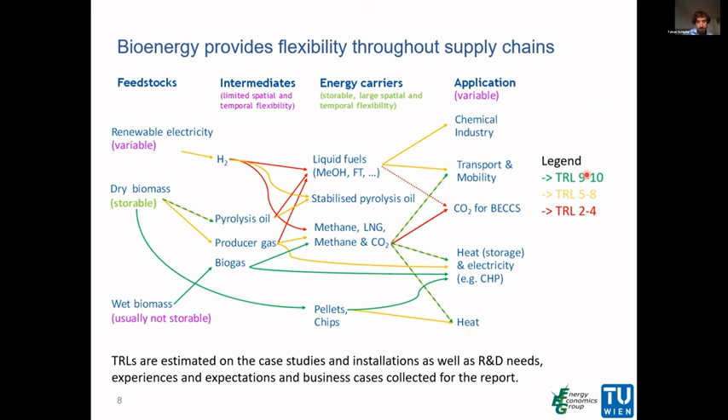But where we see specifically further demand for technological development is when we go to hydrogen integration into this system. For these options to be able to unfold their flexibility potential in reality, first we have to unfold their flexibility potential theoretically in the integrated assessment models and other energy system modeling efforts. After a year of work, we can say that we are still in the beginning of constructing a full-fledged techno-economic catalogue, which could support this work.

To account for feedstock flexibility, we will have to include parameters such as seasonal occurrence, spatial availability, but also the properties of the main product when we talk about residues, or the negative or positive impact on ecosystem services. These have to be considered for the feedstock flexibility part, the beginning of the supply chain. For the bioenergy carriers, the intermediaries, such as wood pellets or biochemicals, we draw on an own field of research, but also on flexibility from short and longer term electricity storage. The energy and carbon density and biostability will be specifically decisive for the cost calculations here. Further, self-ignition risks and existing infrastructure, for example biomethane gas grid injection options, are important here.

And then we come to flexibility in the most narrow definition, only in the electricity system itself. There it will mainly have to be discussed based on the already discussed and accepted parameters such as ramp rate, capacity, duration, and other frequency constraints.

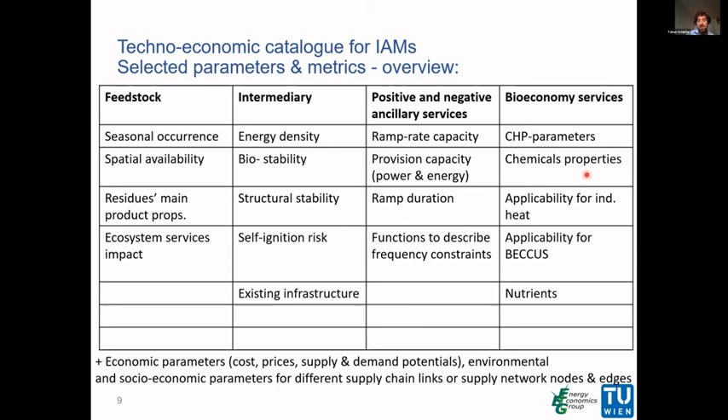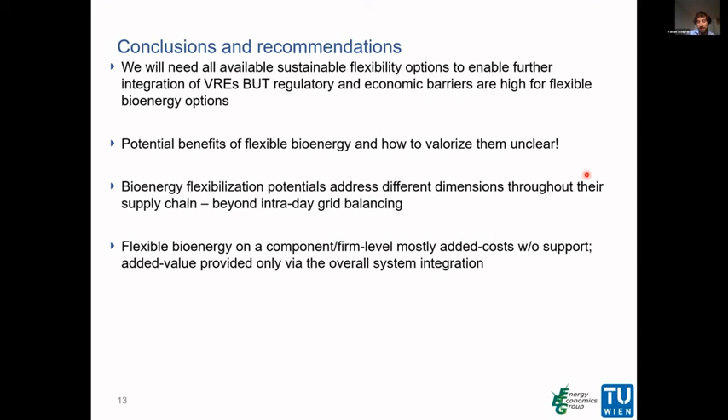What makes this work even more complex, but also much more exciting and promising, is that bioenergy flexibilization potentials address different dimensions throughout the supply chain, going way beyond intraday grid balancing. But for all these potentials, looking only on the component or firm level, we mainly find added costs if there is no support in place. The added value, we assume, is only provided via the overall system integration.

And for the system level assessment, our preliminary catalog has to be extended to consider, first, long-term flexibility, contributing to the power sector, mainly of the intermediaries and bioenergy carriers, which can be stored over longer periods of time. On the next level, also the contribution to the overall energy system beyond electricity, especially residential heat and industrial heat. And finally, also the broader bioeconomy and its goals, thus including, on one hand, sustainable feedstock flexibility, and on the other side of the chain, the product flexibility and other services of the bioeconomy.

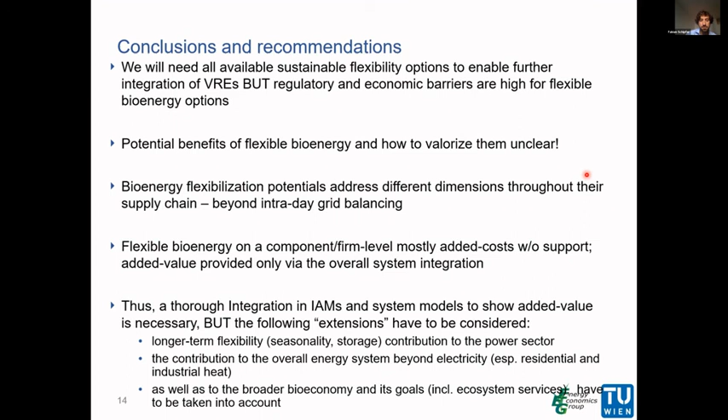Finally, after this work, we define flexibility from different perspectives, from the process or component level perspective and from the system perspective. And we extend flexibility with different dimensions, including temporal and spatial flexibility, feedstock flexibility, operational flexibility, and flexibility in the use of bioenergy and end products.

We are looking forward to publishing the final report soon on our homepage. Thank you very much for your attention, and I'm looking forward to your feedback and questions.